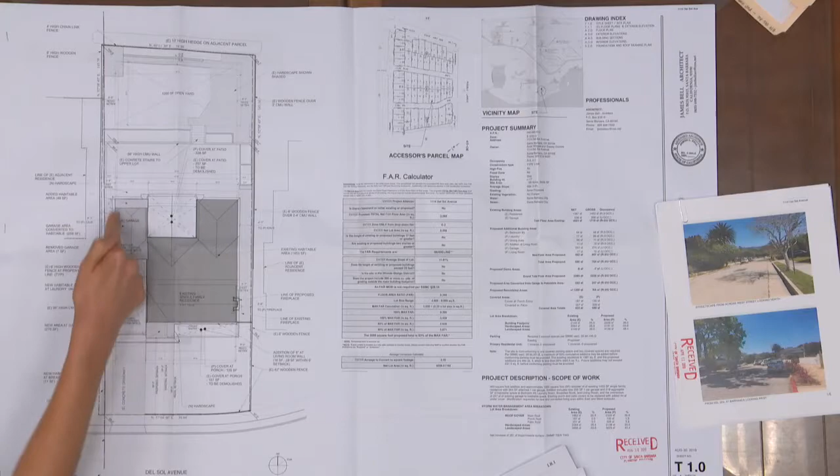Again, to recap, staff supports this project because we think both the new addition encroachment and the window changes are minor. We don't anticipate any privacy impacts to the adjacent neighbors. We feel like the garage, using this line of development with this small addition, keeps in line with the existing development, and the new garage is proposed to be conforming to the setback. So if there are any other questions, I'd be happy to answer them.

Great, thank you. I don't have any questions right now. Did you want to add anything else? Can you state your name for the record? I'm James Bell, the architect, for Stacy Gomes and Scott Whips, the owners. And I'm Scott Whips, the owner of the property.

Okay, great, thanks. So this hearing is just to include the 8-inch addition into the front that encroaches into the side setback. Okay, great, thank you. I don't have any questions for you right now, so I'll open the public hearing. Is there anyone who would like to address the staff hearing officer on 1114 Del Sol Avenue? Seeing no one. Have we received any emails this morning? No? Okay, so I'll close the public hearing.

Yeah, we did have the hearing, like Ellen said, a couple weeks ago, and it came to light that you wish to increase the floor area, an 8-inch addition, and it seems kind of trivial to have to continue it to notice it, but that's just the requirement. So it's mostly administrative. Yeah, we just pushed it out to accommodate the structural.

Yeah, so as we discussed at that hearing, the modifications in this western interior setback represent an appropriate improvement. It extends the building line. It has no new openings in the interior setbacks, so it's not anticipated to cause any adverse effects off your project site. Again, on the eastern setback, the change to allow that 8 inches won't even be noticeable to the neighbor in terms of the existing building there.

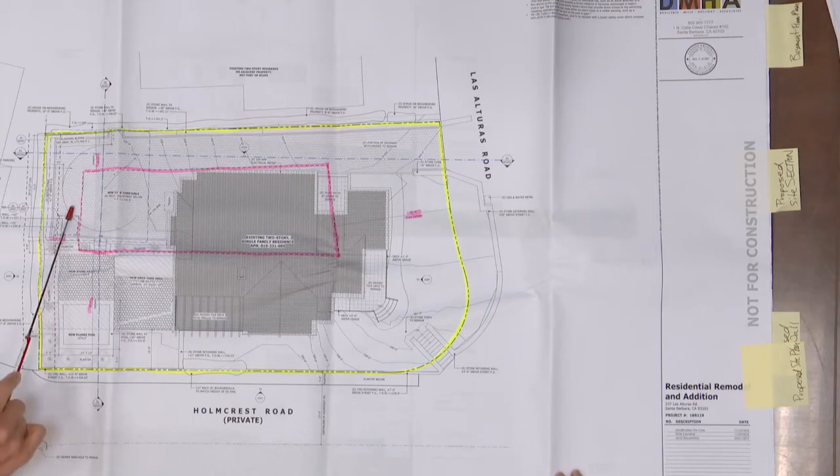The proposed project involves the conversion of the existing garage to habitable floor area, a partial interior remodel, new exterior doors and windows at the newly converted garage area underneath here. The relocation of parking to 2 uncovered parking spaces and a mechanical turntable here. Site improvements including this plunge pool, a new patio area, new HVAC system. And this proposal also includes abatement of violations that were identified in a 2012 ZIR.

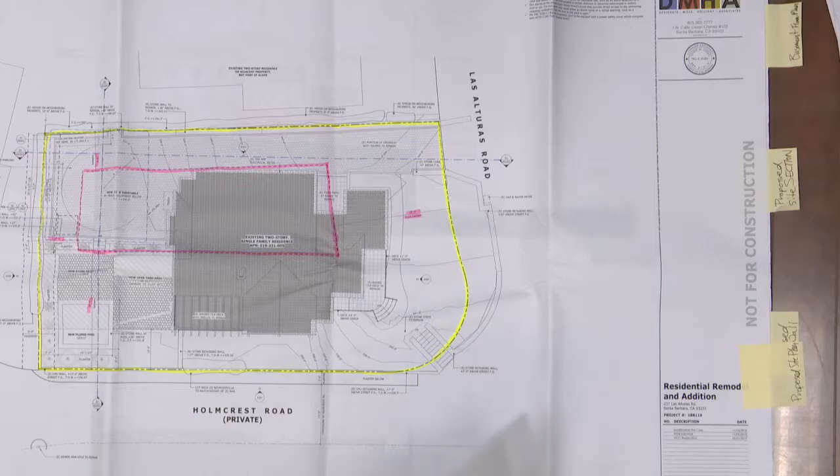The project did go to Single Family Design Board on January 7th, and the board commented that the front setback modification is aesthetically appropriate for an unusual property with the 2 front setbacks and the location of one of the front yards along Holmcrest Road, the private street here. Just one thing to note, the SFDB commented that it doesn't pose any consistency issues with the SFDB design guidelines. Prior to this applicant's return for project design approval and before building permit, they will have to get approval by SFDB for the 2 uncovered parking spaces as part of the project. So again, the reason for the front setback modification is for the new plunge pool.

For pools, it's a 15-foot requirement. So you can see this is the property line here. This pink line represents the two 30-foot front setbacks and then the 10-foot interior setbacks. Pools have a different standard under Title 30 that they need to be 15 feet, but the plunge pool is proposed 5 feet 1 inch from the front lot line.

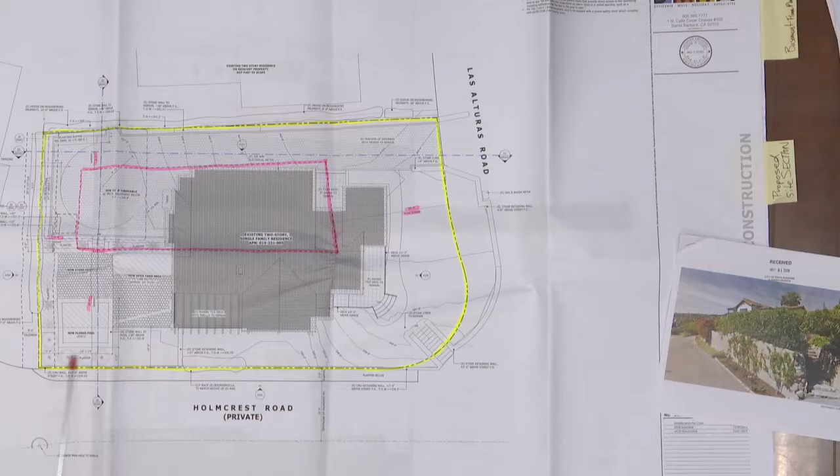The secondary front lot line, I should say — basically this is Holmcrest Road, which sits at the bottom of approximately a 13-foot CMU wall. So the actual property is quite a bit higher. We can maybe turn to the site section, I think it's maybe the best one to see.

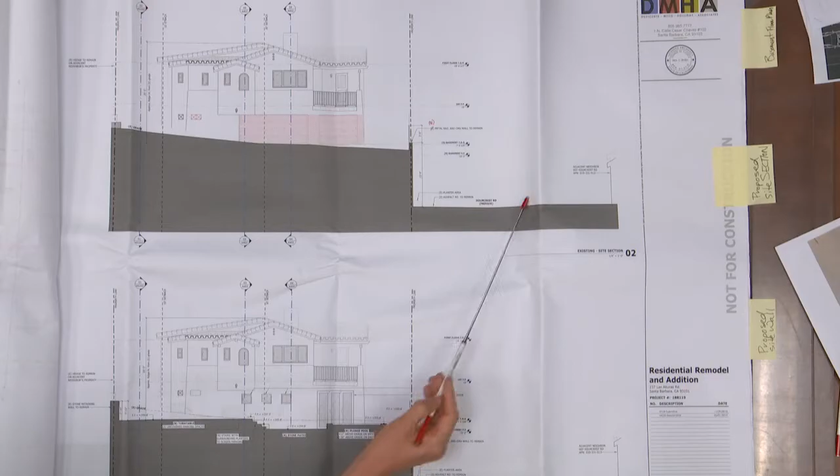So here you can see, this is looking at it from the interior neighbors. This little section is Holmcrest Road, and this is the back of the property. Let me see if there's that site wall... there we go. In terms of the pool, this pool is located right here. So here's Holmcrest Road, and this is the approximately 13-foot CMU wall. The applicant is proposing a guardrail on top of that wall, and then the pool, this small plunge pool, sits down underneath — this is the separation, the 5-foot separation.

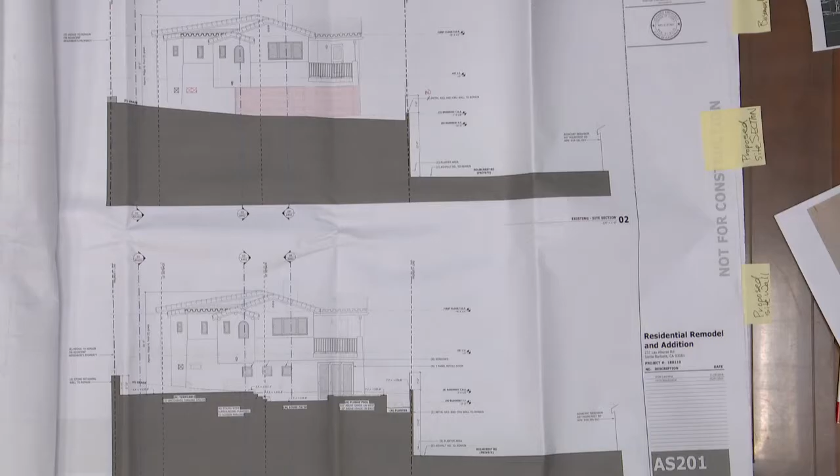Ultimately staff was supportive of this particular request because, based on the height discrepancy between Holmcrest Road and the plunge pool in the distance back, we don't think it's going to cause any kind of privacy issues. It's set down a little bit lower. You'll notice that the properties on the other side of Holmcrest represented here are all front-facing. Many of them are covered by trees and landscaping. Covered parking is front-facing, so there's not a lot of window — you won't have as much interaction necessarily with your neighbors along that area.

So we didn't necessarily see that as a problem. I also wanted to point out that on this site plan there's a previously approved modification for the residence, and one of the conditions of approval was to have some kind of landscaping to create a bit more of a privacy buffer. So the applicant is going to be keeping this bougainvillea hedge maintained at the height of the existing guardrail to create a bit more buffer. That was just a conversation about what this wall is and that the guardrail would be exempt from any fence height requirement based on the Title 30 zoning ordinance.

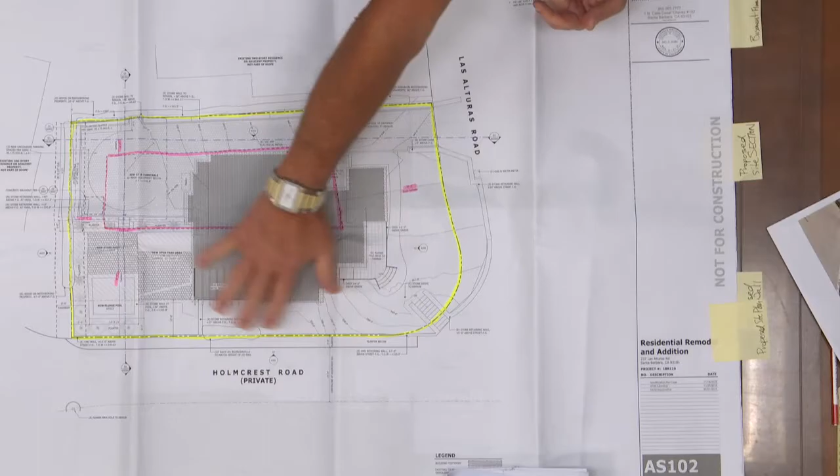I was out to the right side, yeah, so that's kind of it. The other thing is parking is extremely difficult, and this is a very narrow drive, and this is a blind corner. All of us who live up here know this is really a bad scene.

So for Claudia and I, having to back down into this has been a very, very difficult situation, and we're not getting any younger. It doesn't get any easier. So this turntable is really a magnificent option for us, and I'm sure you know how that works. We can come down here, park both of our cars, turn around, and come safely back out. There aren't a lot of real choices on a site this tight, but that's giving you the background, just to be on the record of why this has developed the way it has. It's been a pretty challenging project.

I think it turned out really, really great. We're real thrilled about it.

Great, thank you. I don't have any questions right now for you. I'd like to open the public hearing. Is there anyone here who would like to speak on this item at 237 Las Alturas Road? Seeing no one, have we received any emails? Okay, so I'll close the public hearing.

Like I said, I did go out to the site and looked, and I actually did park on your driveway. I tried to back out. Well, so I assume you didn't get hit. Still alive, I know. So yes, I experienced what you were talking about.

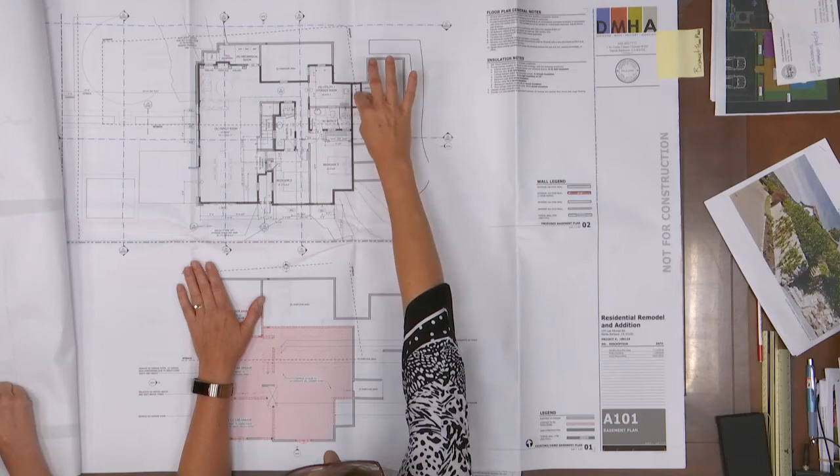I do have a comment regarding your floor plan. It's not going to be a condition because you're not asking for any approvals from me regarding the floor plan, but I do want to point out that it will be brought up in plan check. As proposed, this basement area is not consistent with our zoning ordinance for residential elements, given it doesn't have adequate interior access, but you can only have 2 out of 3 improvements. The three things are a full bathroom, an exterior exit or exterior access, or a utility sink or bar sink. You can't have all 3. So you need to do something - either cut off exterior access, which I know you don't want to do since these are your bedrooms, or take out the sink, because it can't be designed like that. So it's just something that's going to come up during plan check.

Noted. The sink will go. Yeah, just to let you know, take out the sink.

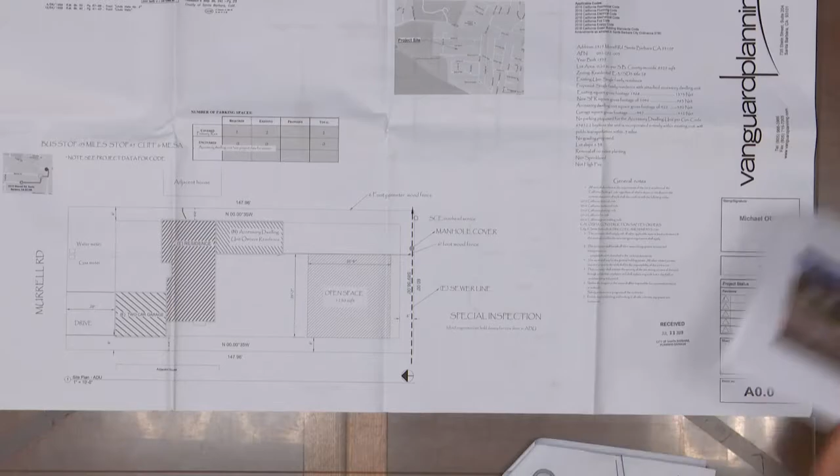So this is an 8,929 square foot lot that's developed with a single family residence with an attached 2-car garage. This site does have a permit issued for an attached accessory dwelling unit located at the southeast, or the rear corner of the residence, under a 2018 building permit.

The proposed project involves the permitting of 2 as-built windows that were identified, I think, during building plan check. The project site contains existing violations from a 2017 enforcement case and also a zoning information report.

So basically, the accessory dwelling unit will be under that building permit. It hasn't been finalized and will not receive its final or issuance until some of these other items are cleaned up, is what I understand.

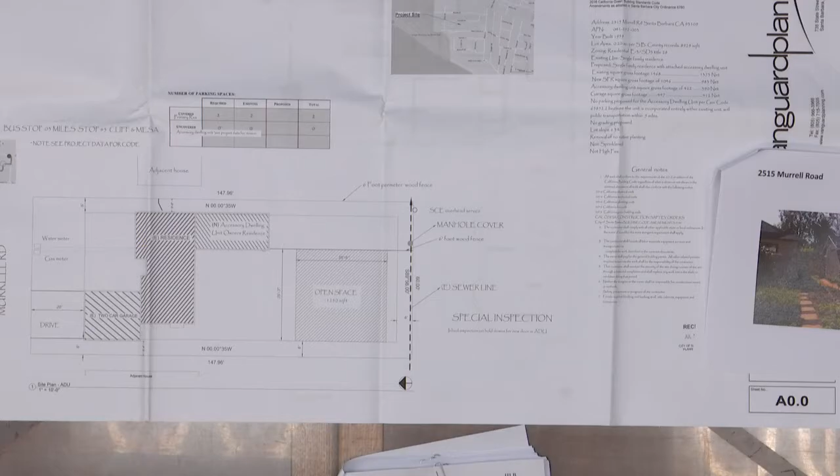So this project is exempt from the single-family design board, but it required an interior setback modification on the eastern side to allow the alterations of first-floor window openings that would encroach in the setback.

One of the proposed windows serves the existing primary residence, one of the bedrooms of the primary residence, and then the other one serves the bathroom of the accessory dwelling unit.

The two windows are... staff just didn't necessarily think that it was going to impact the adjacent neighbor. The adjacent neighbor's windows, if we go to the other page, are 5 feet above finished floor. The window opening for the accessory dwelling unit bathroom is quite small.

So here's the adjacent neighbor. This is the one as-built window here in the primary residence, and then the other one is this small accessory dwelling unit bathroom window. That one doesn't even face toward them, it just faces the open yard area, and it's quite small. So we don't expect there to be any privacy impacts along this one.

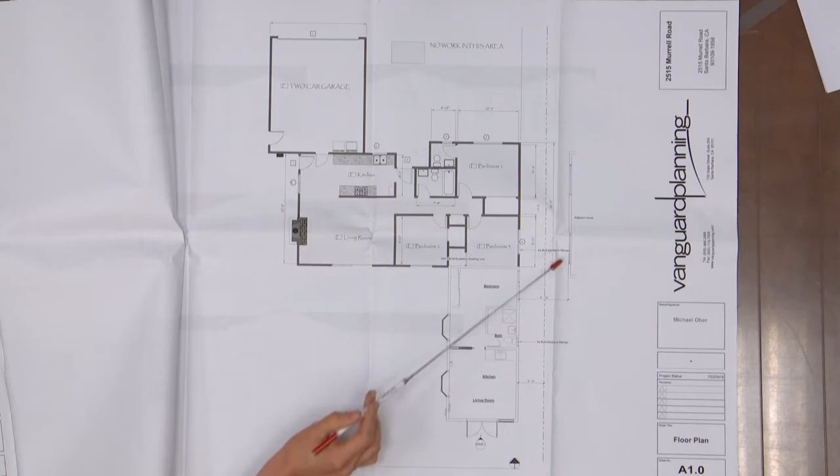This one is in line with the other window, but again, this window is 5 feet above finished floor area. It's kind of a long rectangular window, so there's not direct access to look straight in at one another. So we didn't anticipate that to be an issue either.

This is in the coastal zone. It's in the non-appealable jurisdiction of the coastal zone, and it qualifies for a coastal exemption. We haven't received any public comment, and this project would be exempt under 15301 existing facilities and 15305 for minor alterations and land use limitations.

But if you wanted to say. Great, thank you. Would you like to state your name for the record and provide additional comments?

Yeah, hi, Jarrett Gorin from Vanguard Planning. Mike Ober with Vanguard Planning.

Okay, so I think Ellen covered it, and a couple of clarifications as to the status of the accessory dwelling unit: that building permit's approved. The permit's been approved and it is issued. So when we're talking about finalized, we're talking about occupancy clearance and final inspection on it.

Yeah, so there were some other interior violations here that are all being abated, and they issued this, but the final occupancy clearance is tied to these things being also finally cleared. So that's how those things are tied together.

As to the modification, this is an original bedroom in the original house, and obviously it had a window on it of some sort. The reason for this modification is that we and staff looked hard to try to find any sort of documentation of what that original window size was. Just given the nature of plans from when they built this house, there was no way for us to confirm it.

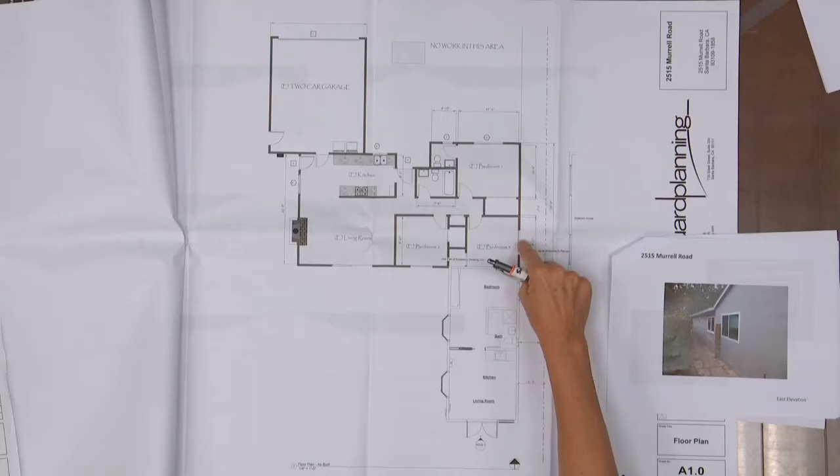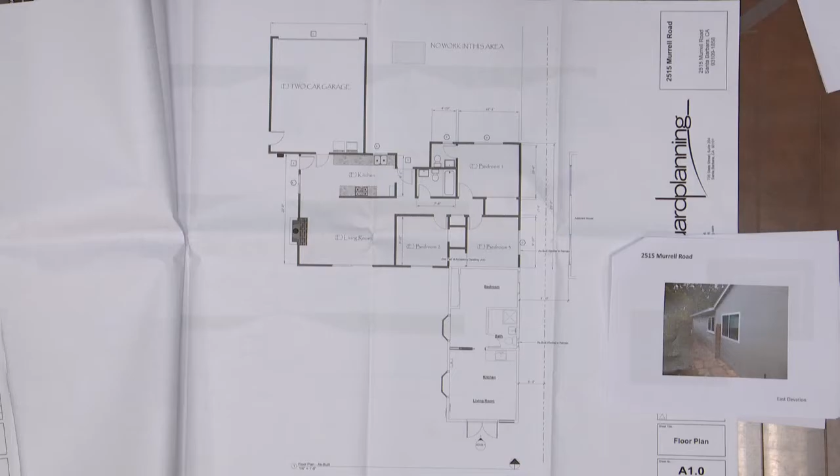So in terms of a window, the window was probably there, because if this was always permitted, there has to be one. We don't know if the window was originally here or there, but when they permitted this, had it been there, it would have been closed off as part of that permit, and they would have been required to provide one here. So in any previous scenario, there had to have been a window approved at that location. We weren't 100% on what the size of it was, and obviously if you change a window to a larger window within a setback, that triggers a modification, and so this is the way that we want to get it covered and permitted.

I'd like to open the public hearing. Is there anyone here who would like to address the staff hearing officer on 2515 Murrell Road? Seeing no one, did we receive any emails this morning? I'll close the public hearing.

I did go out to the site and visited it, and I agree that windows sometimes cause concerns or potential adverse effects to the neighbors, but there has to be some kind of window, and a window being there and making it larger isn't going to change really anything. It would allow someone to escape in an emergency.

In regards to the bathroom window, it is a smaller window — you can see it, this one, yeah. So this one is elevated and it's small, and in terms of privacy impacts, along with this fence and landscaping there, it is an appropriate improvement, supportable.

This section says findings and conditions, but staff's not proposing any conditions, and I don't need to add any conditions to be able to make the findings. So I'll make the findings as outlined in the staff report and approve the project.

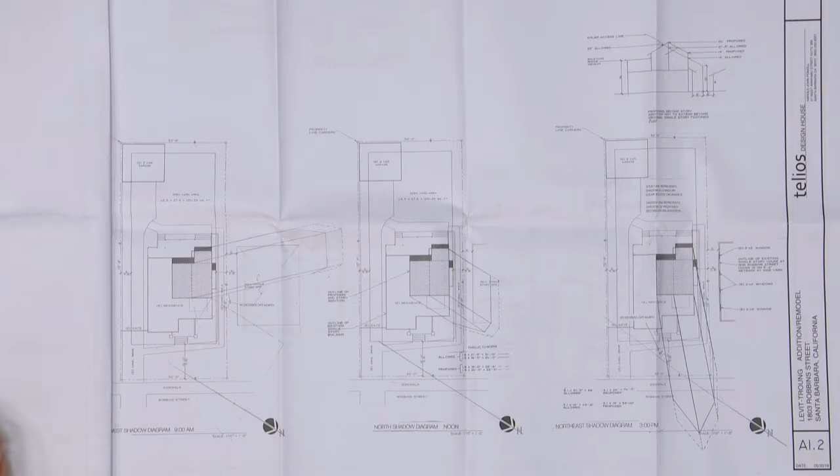On December 21st, and that's what these diagrams will show. So this is 12 noon right here, facing north. 9 a.m. goes northwest, and then 3 p.m. would be a northeast shadow.

Lastly, the fourth criteria is the amount of sunlight on all south-facing windows on any adjacent lot may be no less than the amount of sunlight in the event that the maximum addition in compliance with the solar access height limitations were to be constructed. Staff did review the plans and found that the project meets all 4 criteria for that second story addition.

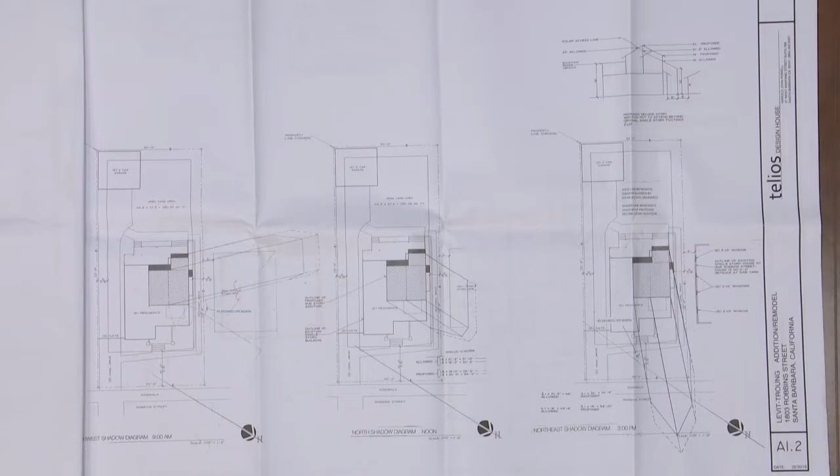If you look at the addition, the second story addition is within the existing perimeter of the building. It doesn't exceed the 25 foot height. The applicant is able to show with this solar study that there's sufficient evidence, with the dashed lines representing the second story addition, and the solid lines on all these shadow studies showing what the maximum height would be under the solar access ordinance.

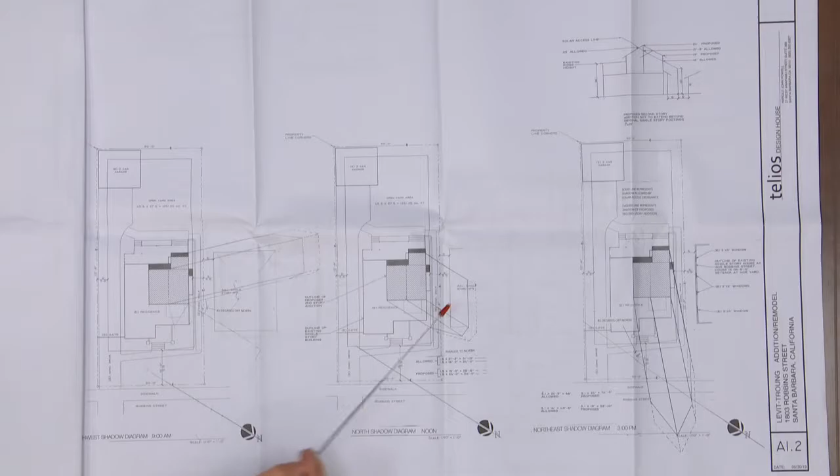You can see that it doesn't necessarily shadow any more of the south-facing neighbors' windows, so that's where we were able to come to it. I know that through this process, the applicant was informed that generally it might meet the requirements, but there could be conforming options, and that did come up as part of the initial pre-consultation process and when they initially submitted.

I just wanted to say I'm going to get to CEQA in a minute, but I do want to mention the public comment we received. I spoke with the next door neighbor at 1805 Robbins, who was concerned about additional shading on this property. This property does not currently have any solar panels or anything permitted at this time, but I think this neighbor was potentially concerned about future solar opportunities on his property, and was a little concerned about why the focus of the design was concentrated on this westerly edge when there was room to potentially design over on this side.

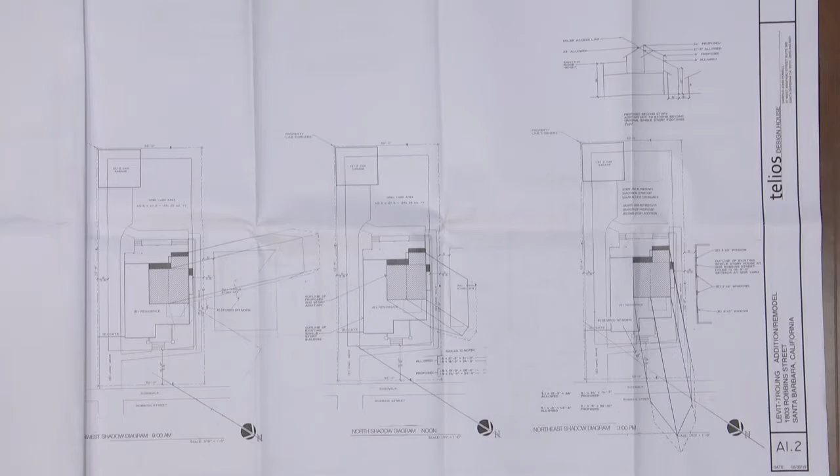This project, we looked at the master environmental assessment. It is in an archaeological sensitivity zone, but at this moment there's no ground disturbance proposed for this portion of it. So we've added a condition as a precautionary measure, but otherwise it would be exempt from CEQA under 15301 and 15305, existing facilities and minor alterations in land use limitations. If you have any questions, that wraps up.

I just have one question. Someone did come into the counter when you weren't in and wanted to look at plans. They couldn't find your plans, so I gave them the plans I had in my packet. Do you know who that person is? Yes, so I followed up. I received a phone call from him, and I was told that they were able to look at plans, but I offered to meet with them the next day at the counter so I could walk through it with them. I didn't speak with them, but the staff person at the counter asked if I knew where plans were, and I offered mine. Okay, great, thank you. That's the only question I have.

Would you like to state your name for the record and provide additional comments? Harold Powell, and I'm the designer. Noah Levit, I'm the owner. Okay, would you like to add any comments?

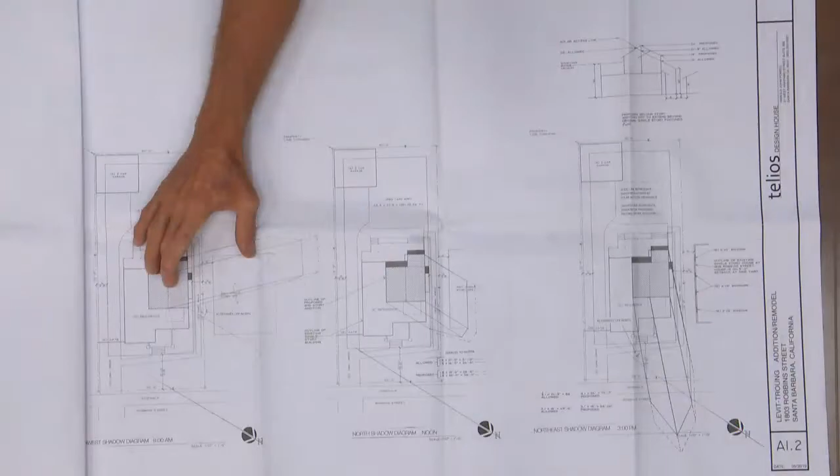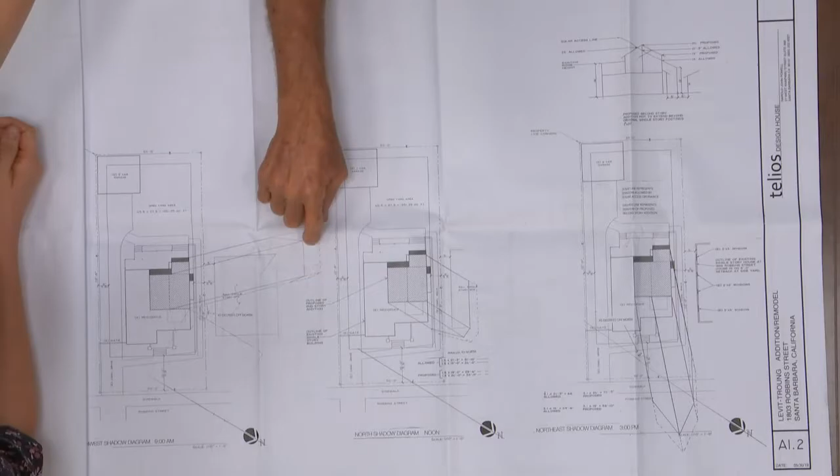I think that Helen did a really good job. If in fact they were ever to put solar panels on this house, this shadow line, which is what is allowed by the ordinance, would shade the area in any event - and not at 9 a.m., but here's noon. So even at 9 a.m., the additional shadow cast by it, actually a foot over, is this area. So it wouldn't impact them putting solar panels on their house at all.

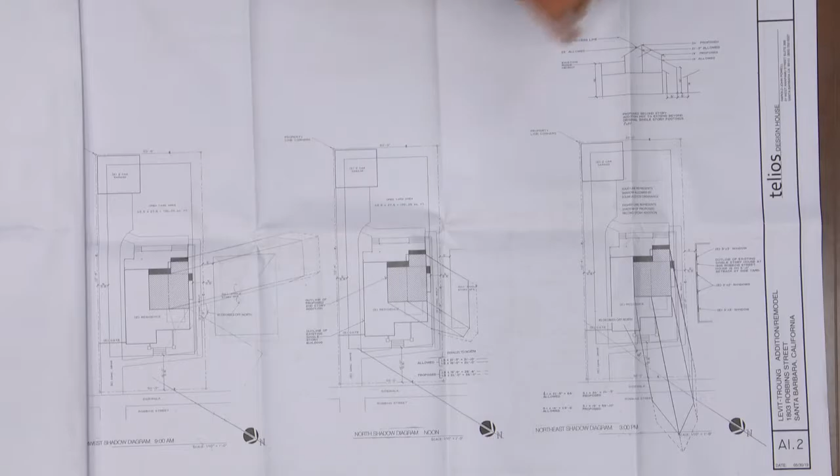The modification wouldn't change how they would be able to put solar panels on their house in any event. It doesn't affect that area. There's no shadow cast by the area that's allowed by the modification. So that's important, I think, for the neighbor to understand so that he feels comfortable that there's really no impact on him regarding the possibility of solar panels. I haven't had a chance to talk to him - I wish I had, because I would have helped clarify that.

And then it's quite a small house. When we went around and around trying to figure out how we could add without impacting the yard - because they have kids and wanted to save the yard, plus we'd have to do a modification for the yard - we came up with this plan over quite some time. We submitted, but we were under the misconception about the northerly property line - that it didn't have two northerly property lines - and that came up well after we had already submitted to building and safety and gotten through design review. So the Levits were all the way to the final moment of building and safety when it became apparent that we had a problem with that. We went back to design, and we've discussed at length why we ended up here and how we got here, and I think it's a really good design.

I think design review saw that too. If you look at the elevations, you can see that it's modest. This is already set at 7 feet. The walls of the upstairs are pulled down so that the scale matches the small and intimate nature of the house. So this is the addition here, and this is the little dormer windows that come out the front.

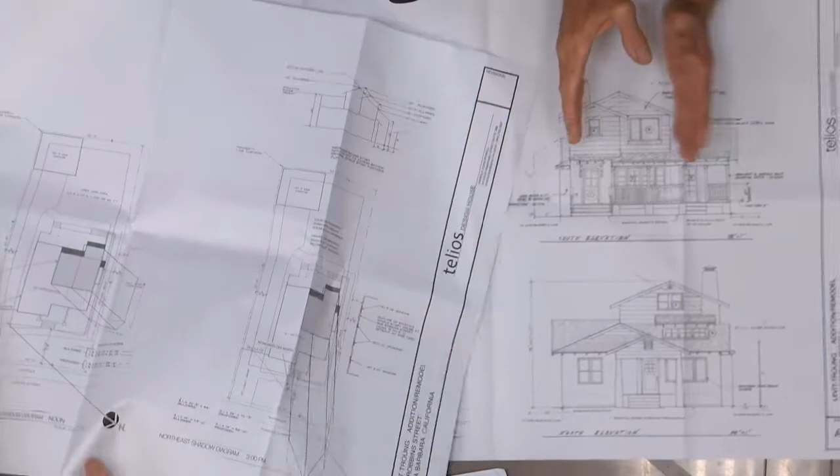So is this here a roof overhang, or what's this? That's existing - that's the existing ridge line. Well, because the site plan shows it right up to the second story, so is it this right here? No, that's existing. And this is a first story addition. So this is lower - yeah, that's the first story addition right there. Is that clear? This overhang is the backyard looking area. So what we're looking at is this - this is a setback. The house, the main body and the addition, is actually 7 feet off, so it's set back further than what would be allowed.

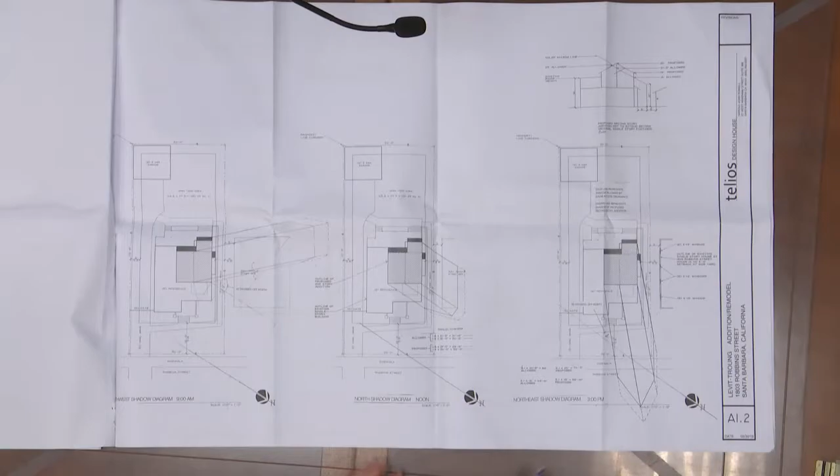I think that's all. So if I were to ask you what conforming options you looked at, the answer would be none, because it sounds like you became aware that there was two north property lines later.

Actually we did, and I explained that in the letter. Let me cover that then. I thought maybe you'd read the letter. Well, I did read the letter, but I'd like to ask questions here.

So here's the small little house, and these are existing bedrooms, right? And this is the living room in the existing house, which has kitchen, dining, living room, and there's a wall through here.

So we looked at how could we get an upstairs addition without... so the bedrooms are here now. We ended up with, if we put the stairs here, we'd block the southern exposure, and if we put the stairs here, we'd block the way between the living room and the other space. So we ended up with only one place for the stairs.

Now, if the stairs were here, they would bisect the room, or if the room was moved over to here, the stairs would come up the middle of the room. So it's very difficult. In small buildings like this, stairs are a really big part of design, and how you find a way to get upstairs.

That's what drove us to where we ended up, because the stairs here blocked us. If you move the addition over here, you bisect it with the stairs, or if you put the stairs here, then you divide the living room. That's why we ended up getting here—not that we didn't want to try to conform, because we did. So we lowered the height of the building with all those ideas.

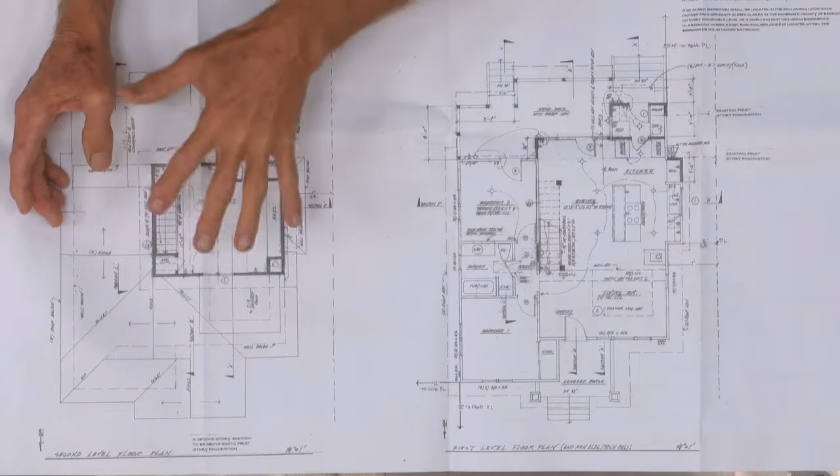We considered everything. We wanted to, so we did everything we could to get to a place where we didn't require modification. We didn't want to get to this worst situation, but we did the best we could to not get there. Okay, so the other question I have is regarding your shadow study here.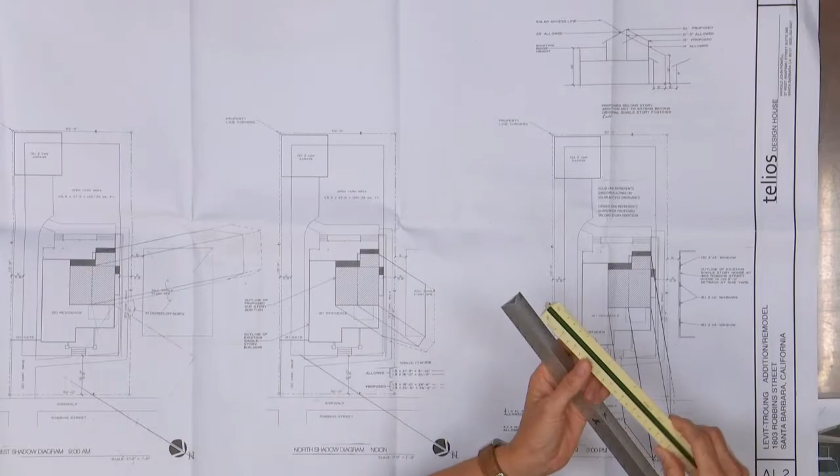So this shows the existing condition. These two are the same, I have two of the same scales. Well, anyways, so this is the existing roof line right here. Here's the existing roof line right here.

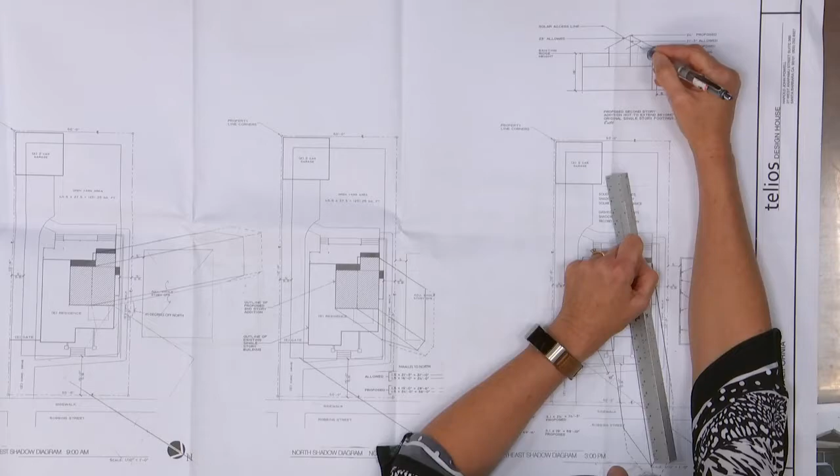Okay, so then when you look, this isn't representative of what could be built, because this is only like 5 feet—you don't get to 8 feet until like here. So to get the clearance on the 2-story house, it would be set back. So showing that this is the shadow for what's allowed by the ordinance, that's not exactly true given the existing situation.

It is back. So can you explain that to me, please? I'm not sure I understand your question.

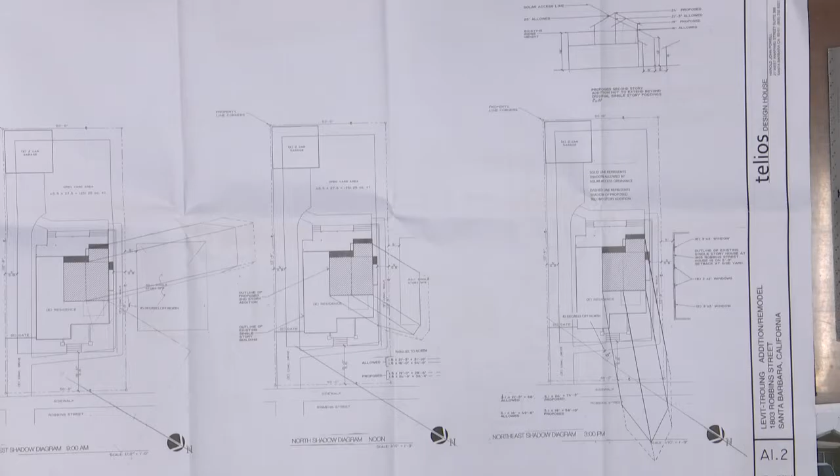Because you say it's allowed 16 feet as the height, and that's actually what the existing house is, 16. So the existing house meets it. Now you're saying that you could—so proposed is 3 feet above what's allowed.

So that's what this shadow is, right? I know—this is a line of 16 feet right here. Okay, but if you were to build this, what's allowed, the existing house is here. So you couldn't add a second story in this area because this is only 5 feet. So you're trying to show what's allowed by the ordinance, but what's allowed by the ordinance isn't reality—it actually wouldn't start right here, which would then make the peak come over more.

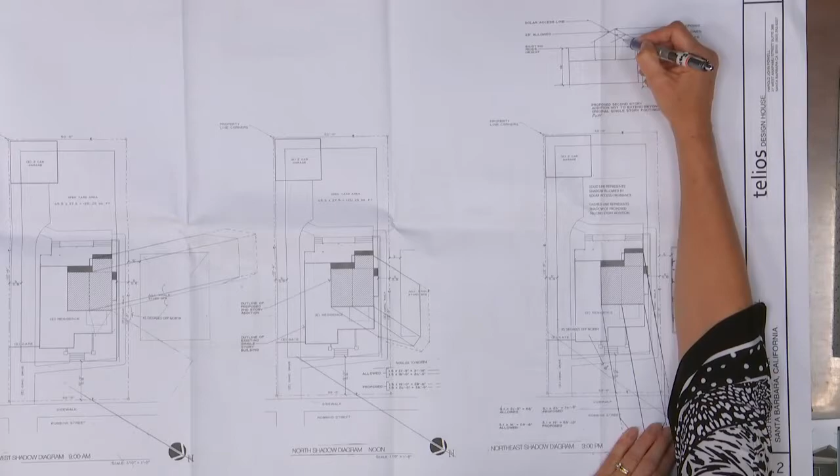I understand. At this point on the property, 7 feet back from the setback, you can go up 16 feet. Correct, right, so that's what this line shows you. That's the line. Okay, so as you state, that's the condition that exists now. Right.

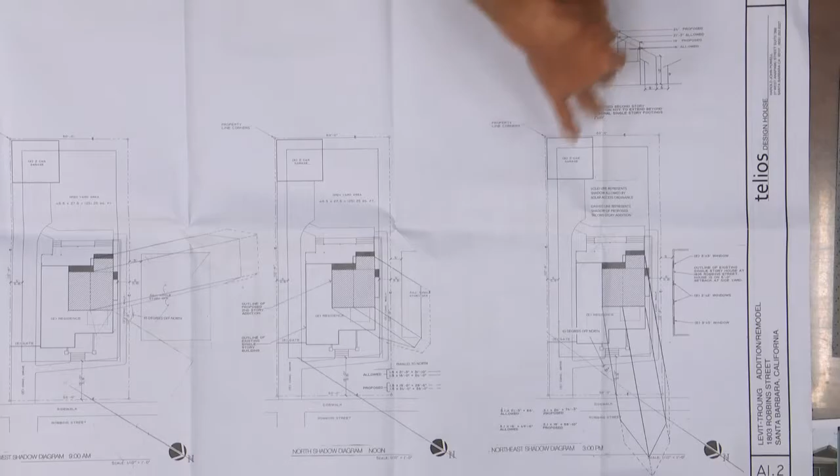So at that point, we're 3 feet above. Right, okay, so that's what this shadow line represents. So is that clear? You're right about this, but the body of the building tapers up along the roof line, so that by the time you get here, we're still 3 feet above what's allowed. And when we get here, we're 3 feet above what's allowed. Does that make sense?

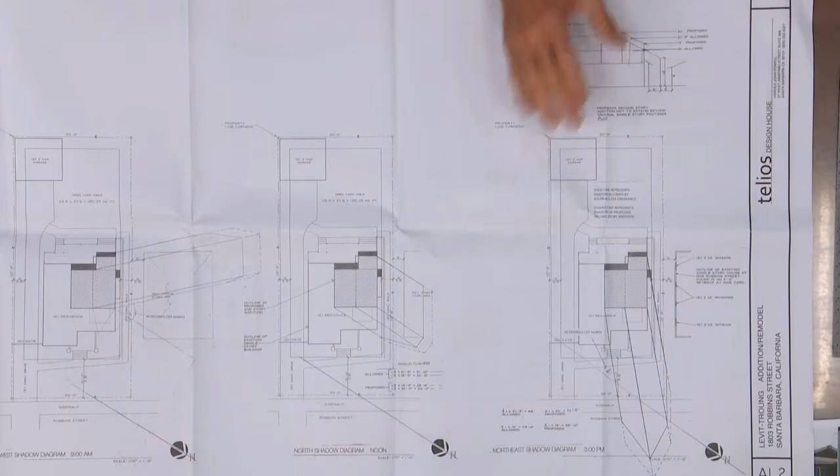Okay, all right. I don't think you're still understanding what I'm talking about. Well, all we can do is show—this shows you what would be allowed by the ordinance, and this shows you what we're proposing. So this is the difference.

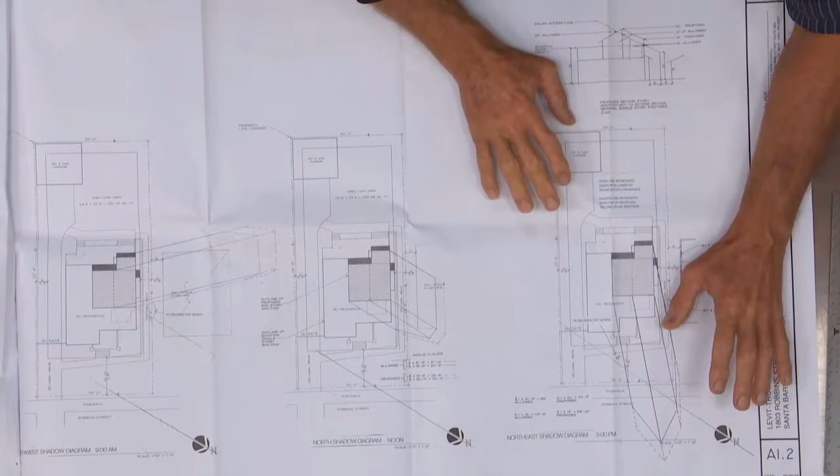So if we wanted to put the wall here for the second story addition, the wall could only be 5 feet tall. That's what you're saying, right? It's the existing situation, yeah. But what you're saying is that here, if we wanted this wall...

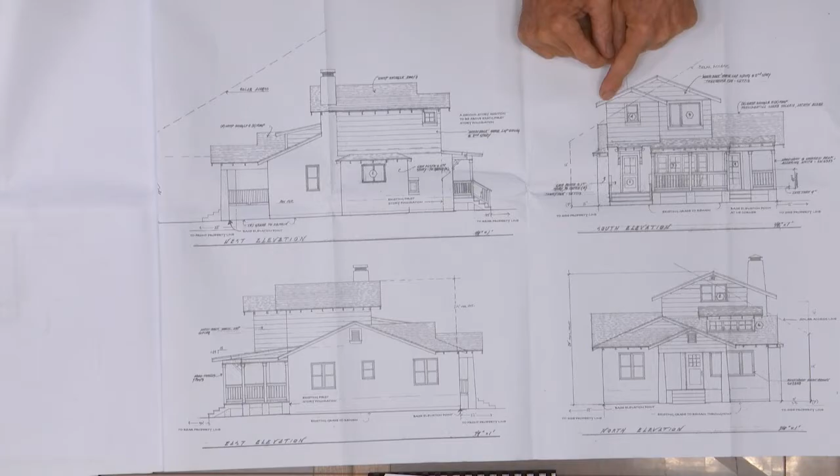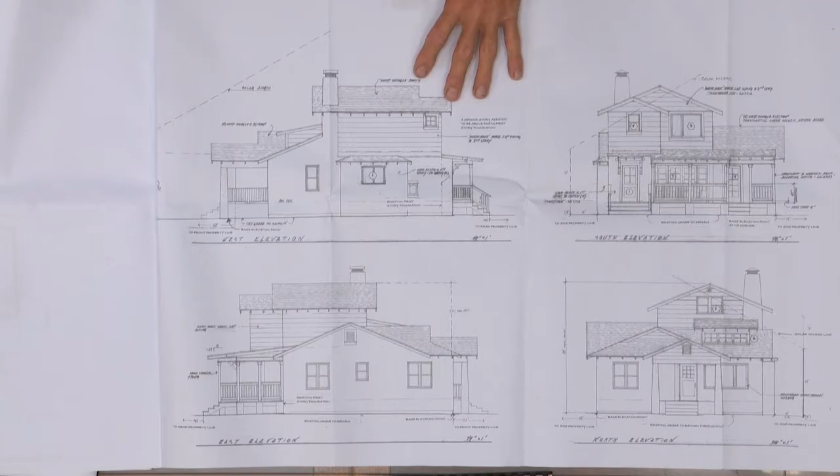Okay, and we did everything we could to try to move this over. Believe me, we worked, Noah, did we not? We spent a lot of time going around. This plan has been hashed over and over and over again. Okay, that's fine, it's now before me, I understand, hashed over, but with the design board. I'm not trying to be difficult. I'm just trying to express to you that we did try our best.

And I think we've come up with a good design, and because it meets the modification for solar access, I think we're there. I think because this does meet the criteria that the modification allows, and I think that's why the modification exists for that purpose, right?

Yeah, there's actually two findings that need to be made. The first one, the modification is consistent with the general purposes of this title, or the specific purposes of the zoning district in which the project is located. Right, so we need to find that.

And then the second one is the modification, the actual findings that went through, that Ellen went through. Right. In the resolution, it does say it may be granted. It doesn't say it's automatically granted. So it's not an expectation. Okay, that's why we're here.

Okay, we're hoping that. And then, so my other question is, I don't understand why this was reviewed by consent versus the full board with the solar mod, but the minutes, and you were there, I wasn't there, and Ellen... I can address that. Let me finish my statement, please.

Okay, so the minutes just say the proposed modification is consistent with the single-family design board design guidelines and city ordinances. Well, it's asking for a mod, so it's not consistent with city ordinances, for one. But the other one, the design guidelines on solar, it says solar access refers to the potential to receive adequate sunlight in order for certain areas of the property to enjoy the benefit of sunlight. It's important for energy efficiency and landscaping, as well as for homes that use solar energy for space heating, cooling, water heating, electricity, and/or daylighting.

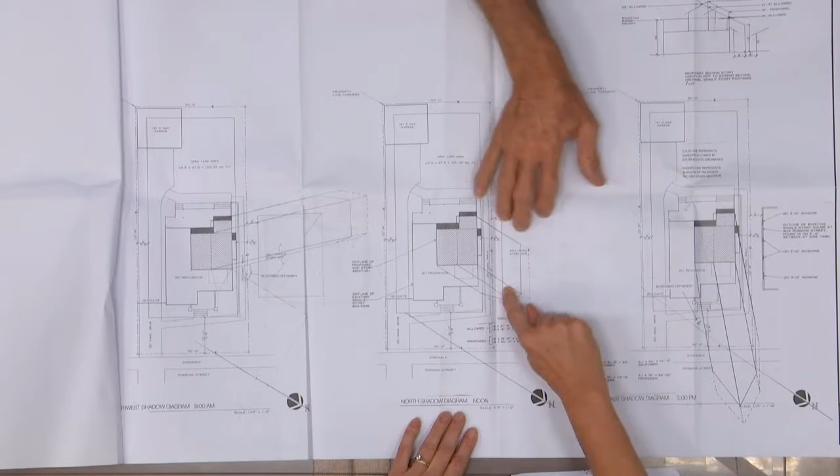So this is where they'd want to put them. Which is showing this right here. It's not all the way out on this side, but it's showing like this. So if it is in the wanted area to put them here, the shadow that's allowed by the ordinance and already cast by the house—because the house is 16 feet tall—is right here. This is the shadow that exists now, and this is the increased shadow by allowing it.

Which is like 20 by 4. But it's on the other side—it's on the north side of the house. So if the panels were here, it's not affecting it, right?

And plus, the increased shadow is out here in the yard, not over the house, and here the increased shadow is in the street. So I think the most important part of this whole exercise is realizing that this difference isn't going to impact the neighbor's ability to put solar panels on. This difference isn't going to impact them at all.

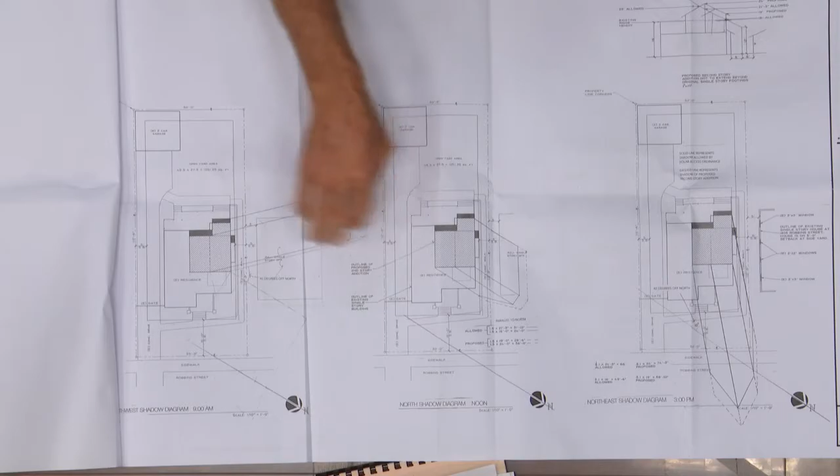You see, it's not even in there. The increased shadow is not on the property, on the house, and here it's in a part of the house where you wouldn't put solar panels anyway.

Okay, all right. Well, those are my questions for right now. I'll get into discussion after.

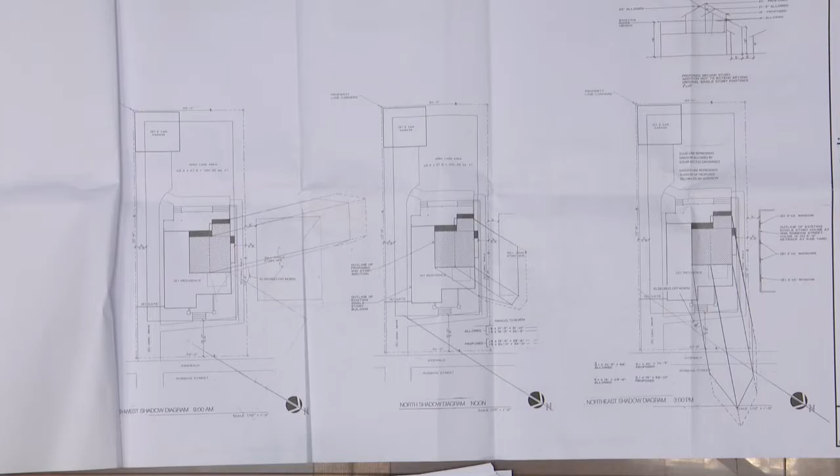All right, great. So, good morning. I just wanted to make a comment that, first of all, I've been going to ABR meetings since 2015. There has only been one time in which anyone has discussed solar access. I do not believe that projects are actually typically reviewed, nor are the boards trained in understanding what solar access is and how to apply that when they're looking at projects.

The only reason I have ever heard about a project with regard to solar access is because an architect actually lived next door. And there was an appeal yesterday at City Council regarding solar access. So I do not believe our boards are trained, they are not informed, and as the staff hearing officer mentioned, she had seen no discussion at the Single Family Design Board about solar access. And you are right, it's a requirement, and I don't believe staff is actually appropriately looking at these projects because no one is looking at this.

I have not seen a PRT, a DART report, a pre-application report since 2015 that has ever discussed solar access. This project does not have a solar study that can actually show the effect of this building on the neighboring property based upon the December date that the staff and the City Council has actually looked at. So I don't believe you should do a thing until a solar access study is actually done.

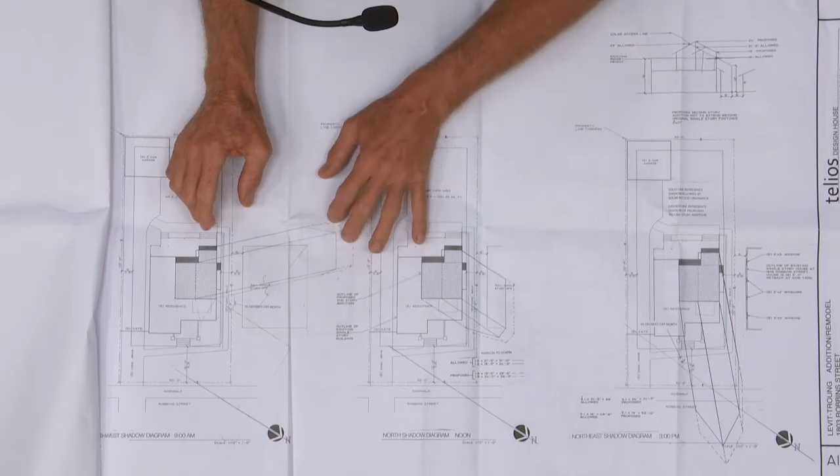You need to talk to her. Yes, you need to talk to me. I just want everyone to feel like we didn't just try to, we didn't go through all this exercise just to get here and show you something that you wouldn't approve. We made every effort to show you something that we thought you would see the wisdom of.

That's why this is so important, and that's why the work that Ellen and I and the other members of the staff did in producing this shadow diagram is so important, because we did do that exercise. We did do a solar analysis, and we've spent a lot of time on this, haven't we? Back and forth, Matt, Michelle, myself, we put hours and hours into this to get it right and to show what we needed to show.

Staff looked at it and said, you're right. We can back this because we have, with you, done the solar analysis. And we have seen that it doesn't further impact the neighbor. It doesn't further impact their southern windows, and it doesn't impact their ability to put solar panels on it. So in that respect, we did a lot of work.

And Noah's been there through this whole process, with his wife and his two small children, trying to get this little addition done to their house. So I think, in all fairness, we should say this in the minutes here, that the solar analysis was done, and it was done correctly, and it was approved by staff. And that you not seeing that, I don't know, you haven't said that you do—do you see that the solar analysis was done, and that staff approved it?

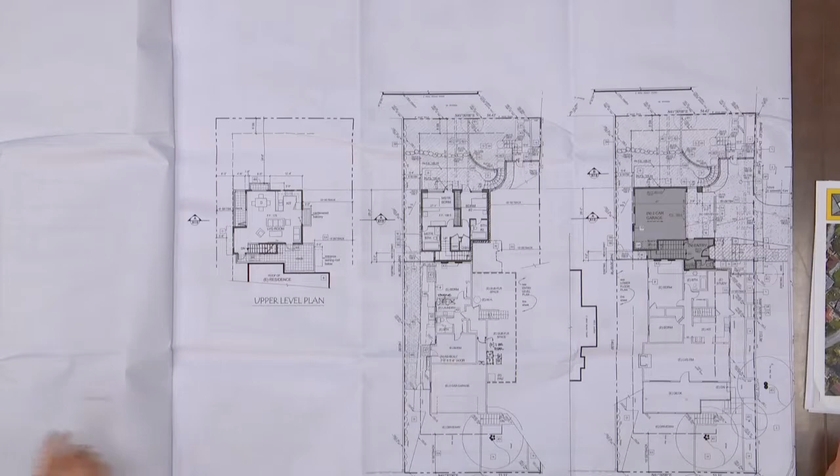The project also includes site work such as the new driveway along APS, improvements to the right-of-way in this area, and the removal of an existing stone pine tree in the setback, with a replacement tree approved by the Parks Commission. Some demolition work of an as-built sink and countertop is proposed, removing this as-built sink in the lower level. There are 2 as-built laundry facilities in this lower level, and the applicant has been made aware that one of them would need to be removed. This permit would address all violations identified in ENF 2019-00519 to abate those issues.

So this did go to the Architectural Board of Review on May 20th, and then again on June 3rd. The board was able to say that the mass, bulk, and scale of the project was supportable as proposed. The board did express concerns regarding the windows along the south elevation of the new residential unit, as that could create privacy issues with the adjacent neighbor, and there was some discussion of how to encourage trees to be planted to create more privacy.

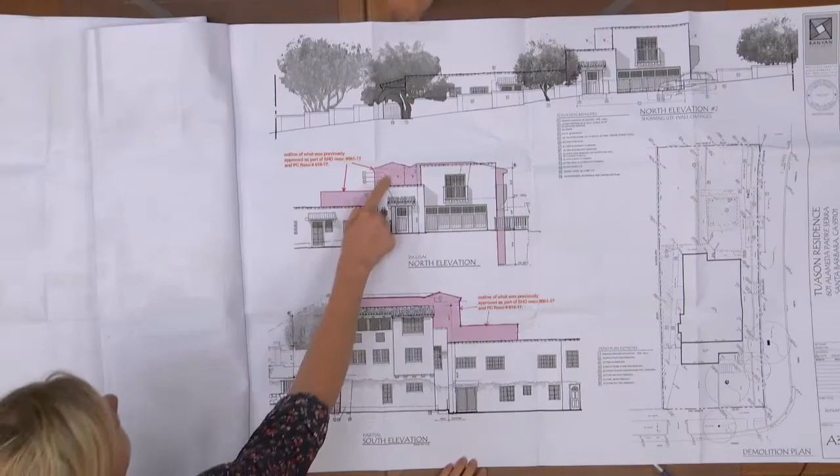I do want to point out that on the elevations, this site received a prior approval. The applicant provided some context of a previously approved project from 2017, shown with a pink outline that illustrated the prior form of what was approved, just in relation to what's being reviewed today.

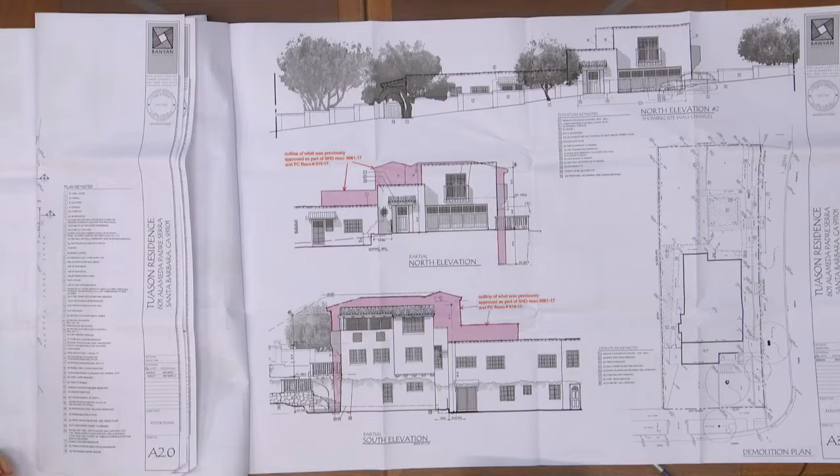In regards to the tree removal, on August 24th of 2016, the Parks Commission reviewed and approved the removal of the existing stone pine tree in the setback, and said it should be replaced with a jacaranda tree on the subject property. Staff included 2 conditions of approval in the staff report to address long-term landscaping and tree maintenance, to make sure that if this is approved, the jacaranda tree that was to be replaced would be properly cared for and addressed if it was unhealthy.

Going back to the site plan, a little bit about that.

So the request is a lot area modification in the R2 zone. R2 is intended to provide areas for medium density residential where the principal land use is 2-unit residences. Density is limited based on lot size and slope. This particular parcel has an average slope of 23.7%, and based on that topography is limited to 1 residential unit. With a slope between 20 and 30%, the lot would need to be 10,000 square feet to be able to propose a second unit that would conform to the zoning ordinance.

So the applicant is requesting a modification to construct a second unit with less than the required lot area. Staff is supportive of this modification, as adding a second unit is an improvement to the lot, and per the city's general plan policies, the production of affordable housing is one of the highest priority land uses in the city. The only way staff could support this is if an affordable unit was approved with this project. We've added a condition, consistent with the previous project, that affordability would be met per the standard condition of approval for affordability.

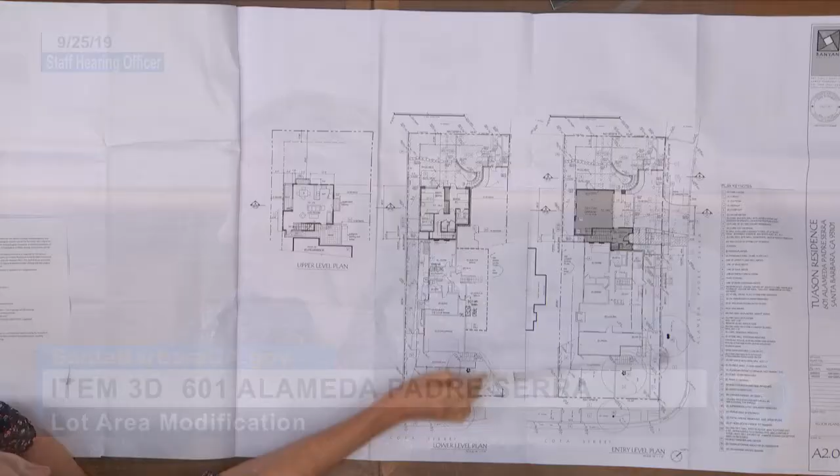We had multiple people talk about maintaining the vistas and views along APS. This public right-of-way isn't slated to be turned into a public sidewalk at the moment, but it is quite a pedestrian thoroughfare to walk along APS.

Pedestrian thoroughfare? What does that mean? Let me finish with my letter—okay, what does that mean?

Meaning that people walk along APS, but there are just questions about how to maintain different views and vistas. It's not called out from a staff perspective, and it was not called out in the CEQA review as being one of the protected vistas.

There were concerns about the new garage and the windows that are proposed, and the potential to create habitable space here that wouldn't be used for parking purposes, that this area could potentially look in on the interior neighbor who sits at this property down here.

Over the conversations at ABR, there were concerns about the mass, bulk and scale of the project, and the 3 stories again, just being a little bit more dominant to the next door neighbors.

And I'll give you just one example. So if you look at the site plan, and this is what I mean by taking more than 5 minutes.

Yes. So just a few more things about the staff report and the recommendation. In the fourth paragraph, it's saying staff is supportive of the lot area modification and adding a second unit on the site if one unit is affordable.

I just want to point out that the property immediately adjacent to it, as I indicated in my letter, which was not mentioned by staff, also has slopes that exceed 20 to 30%. It has a lot size that does not meet the 10,000 square foot requirement. It's 8,307 square feet. It's in the same zone, and it has a recognized legal duplex, recognized as being legal on June 10th, 1991. That's part of the public record, okay?

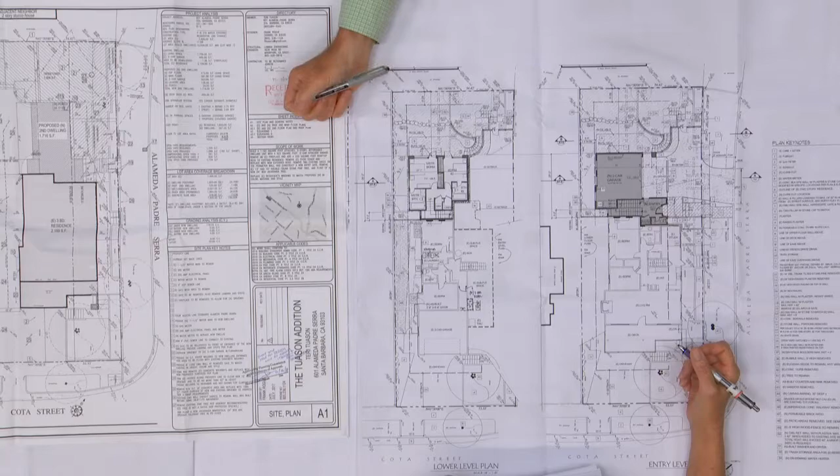Okay, so the fire requirement for window height is that it's no more than 44 inches off the floor. But for a small child, that still becomes an obstacle to getting out of the house. So if you want to create a safety hazard for those folks, if you want to prevent them from being able to access the one private area of their lot where they're not being viewed by their neighbors—

Okay, so we can look at this now if you would like. Do you want to tell me about your project?

You guys don't do that. That's not, I'll have to ask. That's not polite, Kurt, turn around.

So then the project, in regards to what I was saying, like the floor plan and the idea. Well, so what would you recommend as an alternative? So if you're saying this is a better alternative in terms of the floor plan? I'm not saying anything, I'm just asking.

So what you can do, if you wanted to be able to explain that to me, is to explain about this, why this didn't work, and then that. I think that's the way to do it.

I apologize for you being all upset about the staff report. It's just like, you explained it's water under the bridge, and it's just focused on your project. Well, it's not water under the bridge, because I know the neighbors are going to appeal this project, and it's going to become part of the public record.

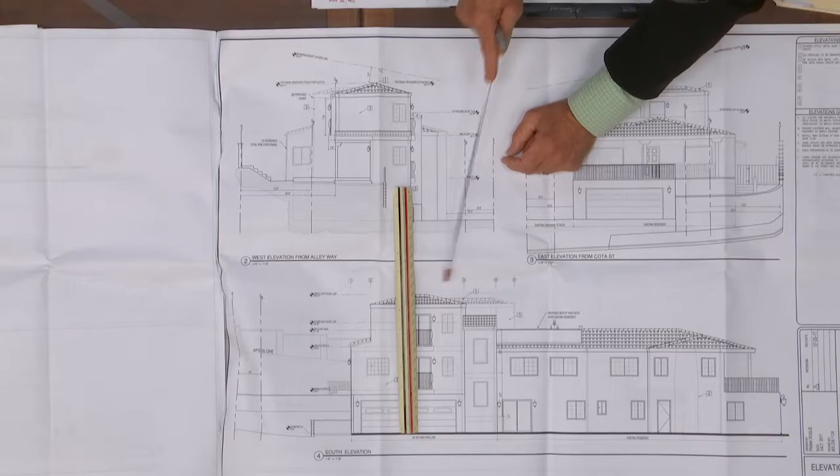And again, I don't know, he made changes to this since the drawings that I have, which were approved by the ABR. So this is a different roof configuration than the one I saw.

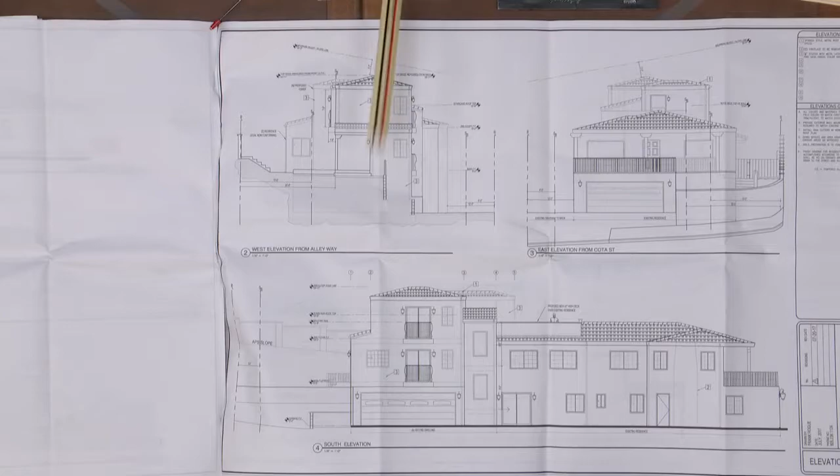So if I may add, this is the Planning Commission set that was approved. But even this would have to be 2 feet higher than the way it's drawn. And the distance is too long for like a sump pump situation?

Well, because we see properties on the bluff that have sump pumps to get the water back up to the street. Yeah, that's an option when you can't get sheet flow to the street, but sump pumps break down and they fail.

I was pointing in the wrong direction, it's over here. This property all drains currently to, other than this wall, on this side of this wall, it's all draining in this direction. So this is where the water is going to go. It's going to naturally go to this spot. So you're going to take all of that site water and pump it out to the street.

In that direction, or you're going to pump it up here. That's a long ways to go for a pump, and the further the distance or the higher you have to accommodate, the bigger the pump has to be. So you're talking about a huge concrete basin below grade with a sump pump in it that always has the potential to fail.

What if the electricity goes out in a big storm? Where does all that water go? It goes into the neighbors' yards and floods their yards. So it's an option people turn to as a last resort, but it's not a good option, and many civil engineers won't even do it because they know there's potential for failure there.

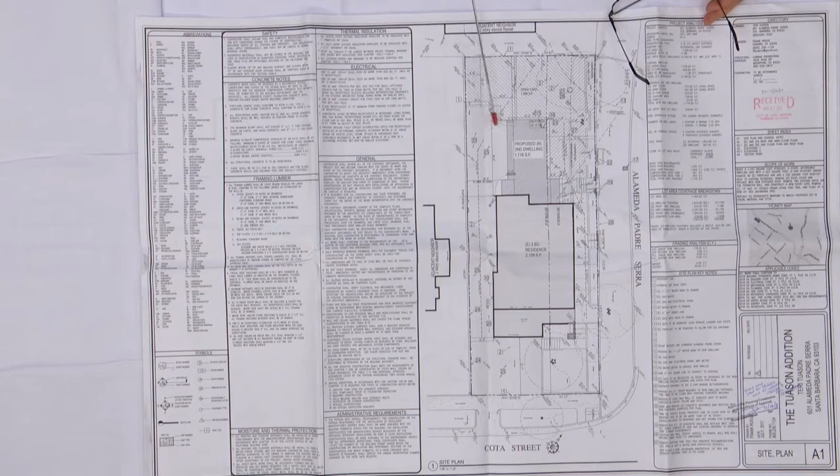So you're talking about sloping it this way and sinking this even lower. To me, that's— I'm not talking about anything, I just asked a question. Well, I'm just saying, none of those solutions are good civil engineering or architectural solutions. You're asking for big liability issues to arise.

But let me also mention one other thing about this, because the suggestion was being made that the reason we're doing the plan we are is because then we have this potential to create additional units, because the bedroom area is separated from the living area. Well, a couple of things.

One is that this project was never approved by the architectural board. It never got approval from the architectural board. They let it go to SHO without unanimous support or even a majority support for the architectural design. And if you look at the history of it, even in the previous staff report, they were still having problems with it.

They were asking for a sloping roof as opposed to a flat roof. They felt that, and it is— it's unattractive, it doesn't go with the existing house. It's poorly designed in a number of ways.

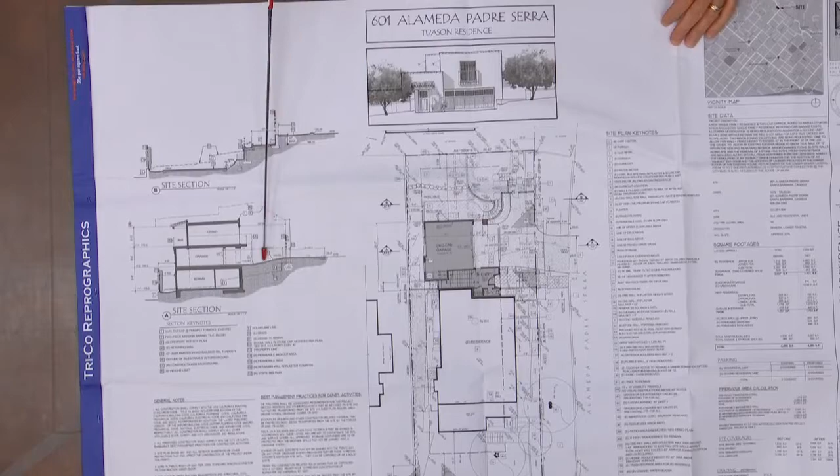So if you look at the section that's provided, we're going from this driveway section to existing APS. This is a very accurate drawing per survey, and even though it's a small scale, it shows the exact grade points of that driveway. There are engineering rules governing all of this.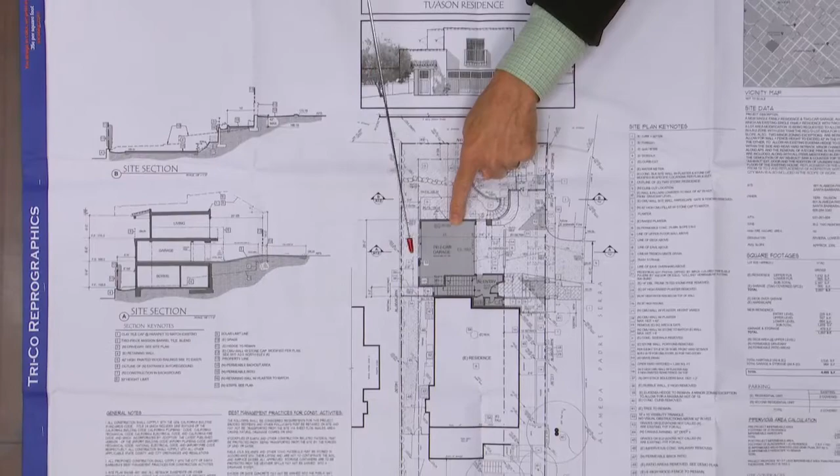We're required to have at least a 1.5% slope towards the street from the property line, this portion being in the public way. We have a slope down here, and then, in order to get the garage level at the level we need to be in order to stay below the height limitation, we're having to slope down at 18% for this portion.

But then there are radiuses required at each of these points where you're transitioning from a slope this way to a slope this way, because we have to slope away from the garage, from the face of the garage. All of this is in conjunction with discussions with the civil engineer to arrive at this.

That puts us at 166 for the slab level of the garage, and of course we need framing below that. So we really have a 16-inch dimension, and with an 8-foot plate down at the lower floor, that puts us actually below the existing grade at that portion of the yard.

So you can see where existing grade is and where we're going to be. But then we also have the height limitation as well, so in order to have space up above it, that's why we ended up with this 8.5 feet from floor level of the garage to the floor level above, because in order to just get an 8-foot plate with a flat roof, we don't even have room to put a sloping roof on this addition because of the height limitation.

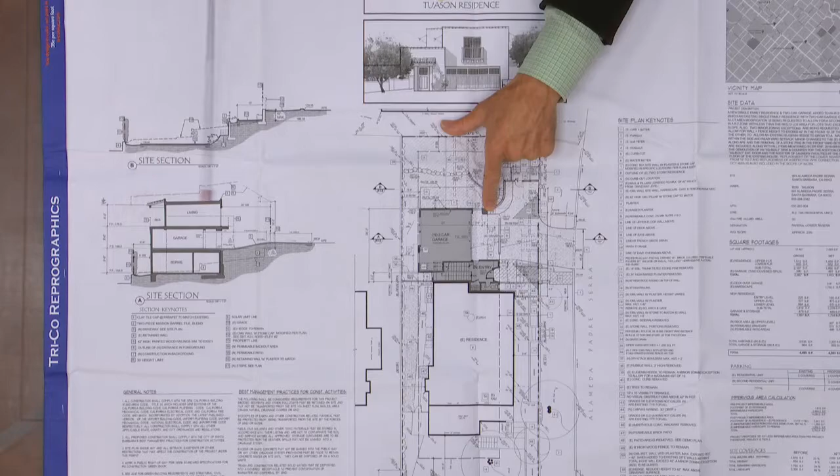That's another reason why we went with a flat roof, besides it going better with the existing residence, is where we're at today. But anyway, we're working between these civil engineering slope requirements for the garage, the height limitation, and the existing grade down below, and we're just squeezing in below, into all of that. It had to be very carefully designed in order to meet all those requirements.

So what are the advantages? The advantages are that they can have a second unit. I don't really see another alternative.

Our original proposal was a little bit bigger in this direction. We pulled it back to make sure we were meeting the yard area requirements, which the previous design did not meet. We also went through a couple of designs with transportation.

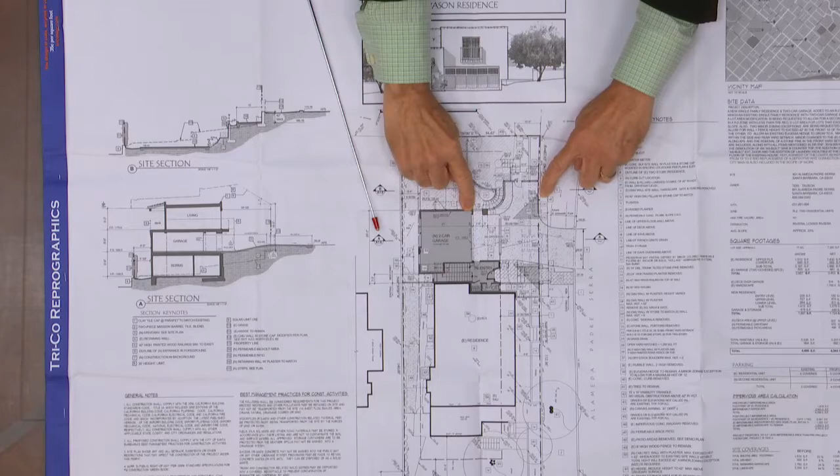Originally, we had this garage area closer to the street, but then we weren't able to back out on site — we would have had to back out either into the public way or onto the street, which you can imagine how dangerous that would be on APS. So the position of the garage was the minimum distance acceptable to transportation between the front lot line and the garage, so that we could get this back-out area. We also carefully designed the stairways down into this backyard area in order to.

How deep is it? Well, that was the other thing—Transportation asked us to make it deeper. We were more shallow before, but the reason we're at the dimension we are now is because when you're pulling back out, it's getting this radius. So that's the other shift we made from our original submittal. This driveway used to go straight; they had us widen it out in this direction and pull this deeper so that this turn could be more easily made.

Well, if you're backing out, you're going like that, you mean? Yes. Okay.

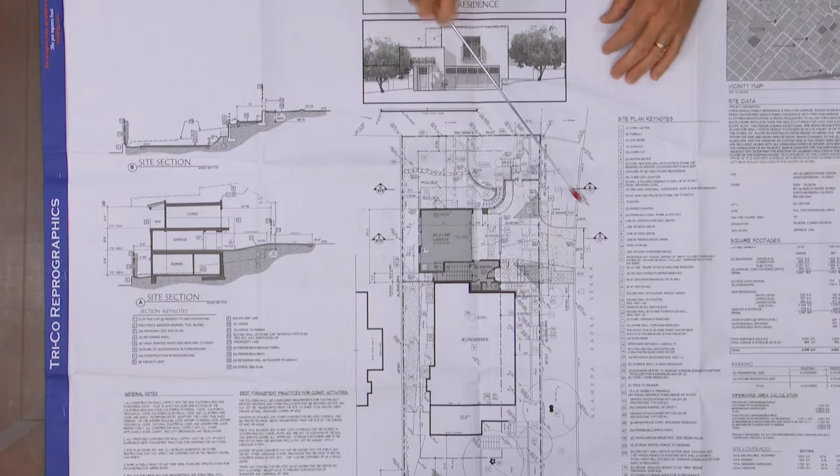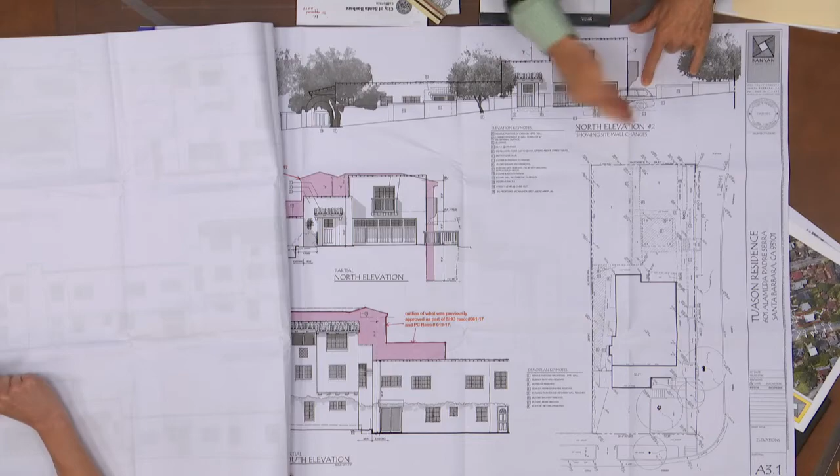And of course, the visibility in relation to the street—this is something else that's come up, and we worked with the ABR on it. Is there still a danger for a car pulling out of there? This is why we ended up with this illustration showing that once a car backs out—this is the backed-out condition—because we're lowering that wall that's right at the property line, the driver will be able to see traffic even before they start pulling out. You'll be able to see traffic and pedestrians as well as be viewed by traffic and pedestrians, even in that backed-out position.

But then once they start to pull out here, they become even more visible. Okay, so that car is drawn in this position right here. So we are lowering this existing wall height in order to ensure that visibility.

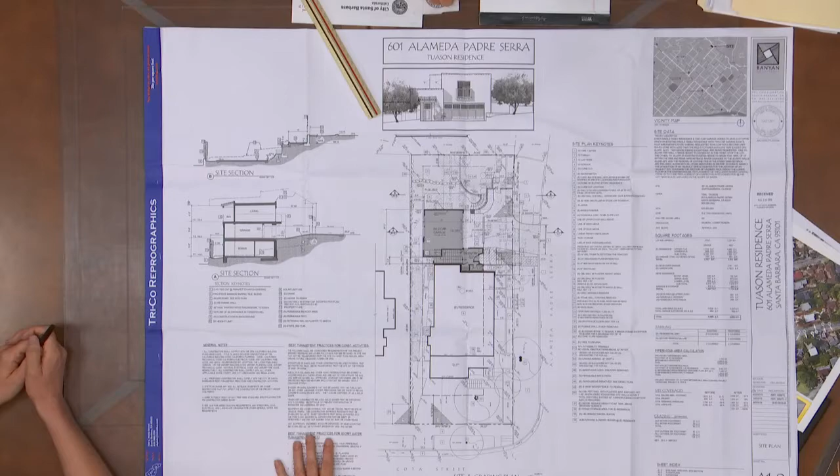I don't know if there's other aspects of the design you want me to address. Another question would be: why not convert this area to have this all be one unit, and then have the addition be part of the second unit instead of two separate units that way?

Well, there's a number of reasons why. Right off the top of my head, no one's ever mentioned that, but I can think of several. One is that, as you can see on this elevation, we're higher—this lower floor is higher, so you'd have stepped transitions between both. This floor level, if you're connecting to this unit, would be entering at the garage level, and then do you make this whole thing one? To me, this is all kinds of issues that come up that seem problematic.

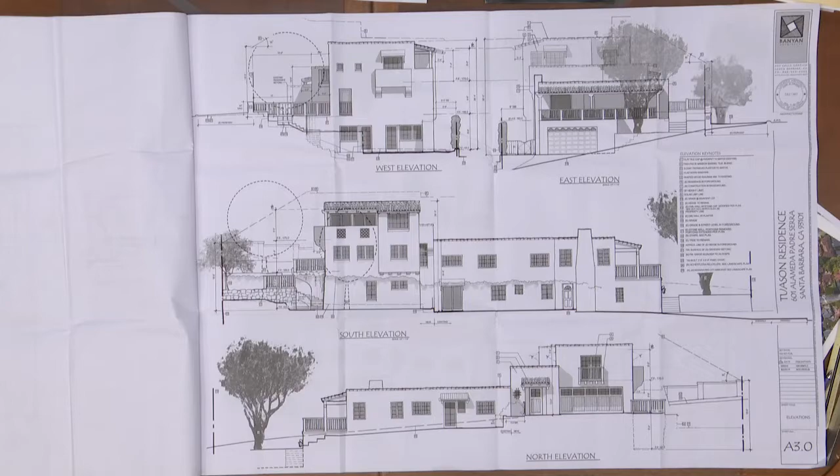I don't see how that helps the project. I was just wondering about your design, if you thought of it or why. No, it's never occurred to me. And again, just off the top of my head, it doesn't make sense to me why that would be favorable in some way. So looking at this level, how do you connect this?

So you're talking about taking out this bathroom in order to connect to the existing structure, then you'd have a vestibule or something that goes up to the stairway connecting up to the upper level, because you're talking about connecting this level to the garage level, which already has—this house already has a garage.

Well, it's more just thinking through this area, since it has had a history of the city calling it an IDU. The property owner may not envision it being an IDU, but it looks like, in terms of our zoning ordinance, it meets the definitions of it. And so...

In reality, it's a bar sink—we're talking about a counter with a bar, a sink that's 17 inches wide instead of 12 inches wide. So yes, I hear what you're saying. You can't technically even have a sink in this area, given what our zoning ordinance says. Well, you can have one in the bathroom, but you can't have one outside the bathroom. Correct. You can have a full bathroom, exterior access—two of the three elements, like I said in the earlier project. And so you have exterior access, you have a full bathroom, and the sink, so you can decide and just do a half bath and have the sink.

But okay, so that was just a question. All right, so then do you have more in here?

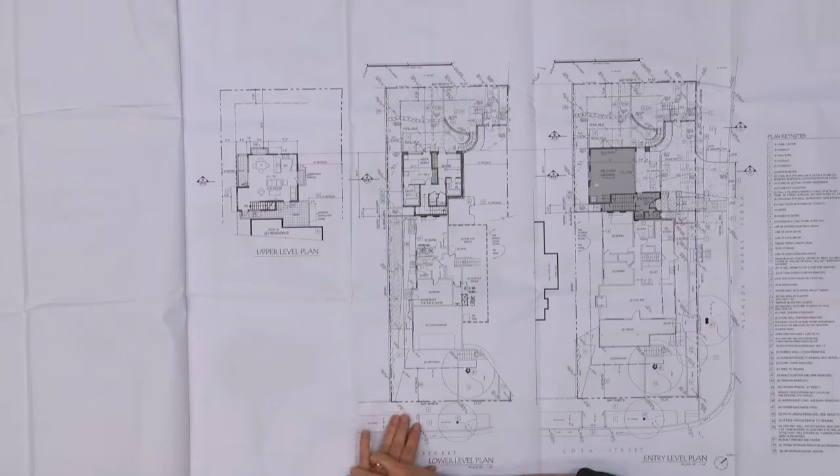Well, no, I'm just, don't be argumentative. I'm sorry, okay? I'm sorry. I'm trying to understand your project, and it's kind of putting me off by your attitude, okay? I'm sorry.

I'm trying to understand it, because my concern is with the zoning ordinance. It talks about residential building elements, adequate and inadequate internal connection, and long hallways. This is totally not connected — there's living area, non-living area, living area. So if I'm up here visiting, you're having a get-together up here, then you go downstairs, it just seems an awkward configuration. So I was just trying to have a discussion.

Sure, okay. Well first of all, I'd say that the space we've got for a kitchen, dining room, and living room upstairs, plus a stairway, is the absolute minimum — only 500 square feet. It's small, maybe 475 actually, so it's not even 500. It's not a lot of area. Each of these spaces is very tiny — a minimal kitchen area, very minimal dining area, and a minimal living room area.

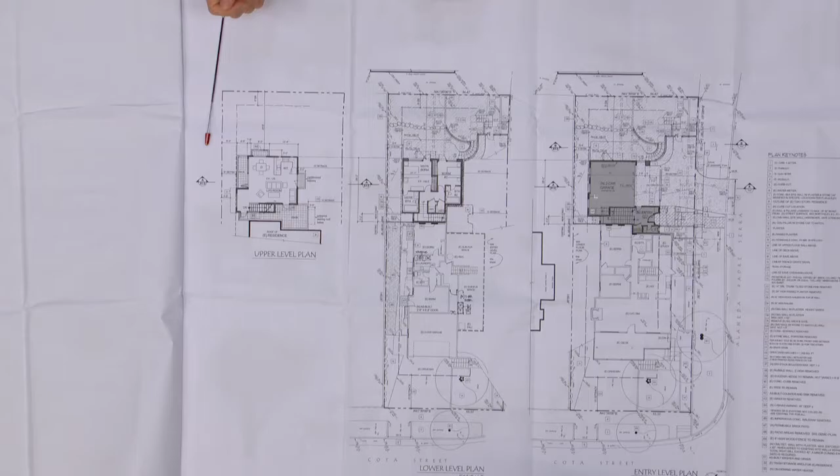That's one reason the decks are so important, so you have some sense of space up there. So to add a bathroom, you can see how it would be problematic at that level. We've been pushed to make that upper floor area, which the neighbors on the downhill side are contentious about because of the visibility of it in relation to them.

Well, similar to what you're saying about your backyard that all these people look down on, this one's going down onto them.

We started out wanting to make it minimal, and we're at the 20-foot setback here, the 6-foot setback line here. The short answer is you'd be adding more mass to that upper floor area in order to add a bathroom. Plus, I don't see the necessity of it.

You see many house designs where you don't put a bathroom right next to the kitchen, because you don't want people using the bathroom right next to where you're preparing food. So often you put the half bath at the entry level so it separates it from the main living areas. It's obviously separate from the bedroom areas, which have their own bathrooms. If you have guests, or someone needs to use the restroom during dinner, they go to another area of the house, not immediately adjacent. So there's a lot of reasons that makes sense. Besides the garage, we do have a nice entryway, closet, and bathroom at that mid-level, so there is important living area that's very much a part of this design at the mid-level.

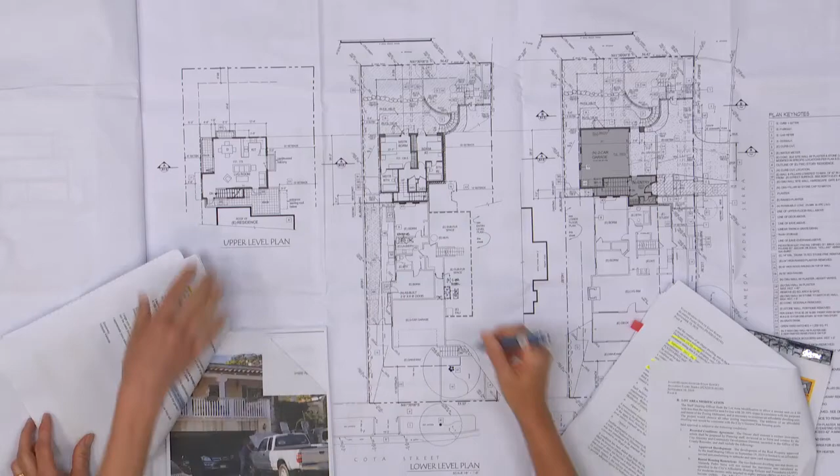Can I interject on that point? I think there's a question about where they were exactly, so this was our best guess based on the images from Lauren Anderson. If this image—yeah, so these are really up here, further up there. These are actually right there. I've never been in that downstairs area. Okay, now that I see it, I just drew it in based on our best guess from the photos—and that was also based on my best guess too, for the recommendation to be removed, for the applicant.

So in regards to the request before me right now, it is a lot area modification, and the findings for the lot area modification is that it is consistent with the purposes—well, there's lots of findings, but the one—shoot, I lost my paper.

There's one that's generally used in terms of the lot area modification. It's similar to what I was talking about right before. The modification is consistent with the general purposes of this title or the specific purposes of the zoning district in which the project is located, and then there's 4 other ones: secure appropriate improvement on a lot, prevent unreasonable hardship due to the physical characteristics of the site, result in a development generally consistent with existing patterns of development for the neighborhood. And the 4th one, which is being proposed for me to make in this instance, is to construct a housing development containing affordable residential units rented or owned and occupied in a manner provided for in the city's affordable housing policies and procedures.

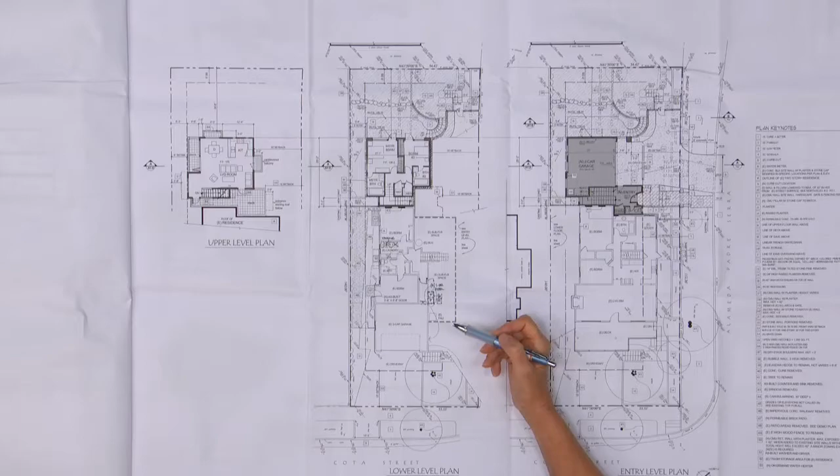Can I get a clarification? So all of this is to be removed, the washer and dryer, but this one would be, they could propose it? Well, they're permitting it, right? It's as-built. Right, so I just didn't know if there was an option between the two. Okay, this one stays and this one is to be removed. Okay, thank you. So, yeah.

So with that, the findings, the environmental review findings, and the lot area findings. So with that, I'll make the findings. I don't need to make any changes to the findings outlined in the staff report, subject to the conditions of approval proposed by staff, and the revisions we discussed today.

So my action is appealable to the Planning Commission within 10 calendar days, and if you were to appeal it, do it here at 630 Garden Street. I don't want you to go up to City Hall, that's where all the other appeals are filed. So it's here at 630 Garden Street. The Planning Commission also has oversight authority of all my actions, and if they felt this warranted additional discussion before them, they can also call it up during that same 10-day appeal period.

And if either of those would occur, Ellen will contact you. Okay, thanks very much.

Okay, sure. And sorry about the contentious tone of voice. Yeah, we just had an appeal yesterday. I adjourn the meeting. You can turn off.